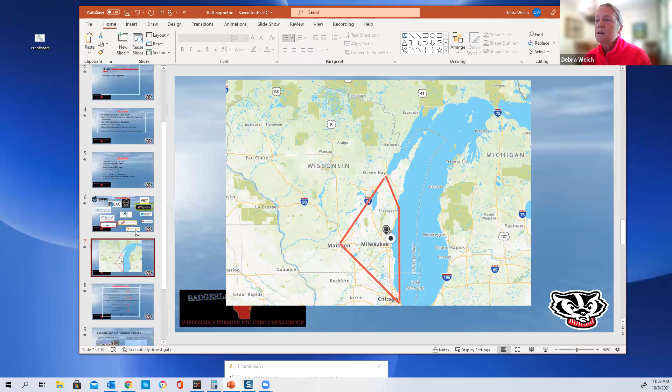So this is our area of Wisconsin, Green Bay to Madison to Milwaukee to Chicago. Most of the people that attend these meetings are Milwaukee people with suburban Milwaukee. We do have membership dues, fees. Since we're just having virtual meetings, I think this year we reduced that by 50%. These have been our typical meeting venues. Manpower downtown, we get that whole center. And then Blue Harbor, we try to go there every summer, but the last 2 years we've had to cancel.

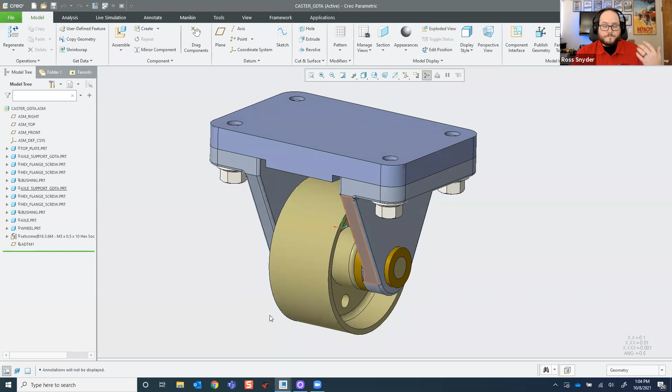So for instance, one of the main parts that we're going to be working with is the support arm here, and you can see that we've got a pressed in bearing and we've got an axle, it's got a support and it's bolted in with M10s, things like that. So with that, I'll jump into a quick run through on our GD&T Advisor tool in general. We've got Creo 8 open here, and of course my little Zoom window is hiding what I need to see. One second, there we go.

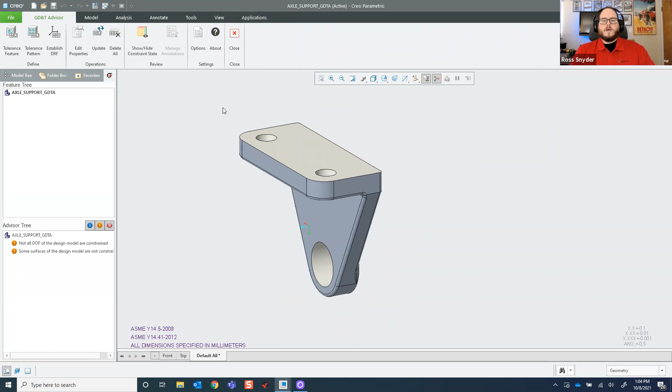Up in the Applications tab, you can pull up our GD&T Advisor tab. Now, once you turn that tool on, up here you can see that we've got an additional toolbar. This is where we're going to be pulling all of our commands in for the GD&T Advisor. Down here, we've got our feature tree. As we start adding our different callouts for GD&T annotations, they will start populating here within this feature tree. It will look very similar to a model tree you would see in a Creo design space, or SolidWorks or any other modeling tool.

Down here is our advisor tree. This is going to populate similarly to the feature tree, but this will all be information based on feedback from GD&T Advisor. So information like what we're seeing now, that not all of our degrees of freedom have been constrained yet, or that we have not constrained certain surfaces of the model. Any errors or informational messages will also pop up here. This is the section of the tool that will guide us through making sure that our GD&T calls are accurate, which is part of why using GD&T Advisor to add annotations makes things quick, easy and painless.

In our main window here, we've got our part, or later our assembly, that we'll be working with. And down here brings us to one of the first feature updates in our latest release. In the window, you can see that our standards are listed: ASME Y14.5 and Y14.41, 2009 and 2012 respectively. One of the things that we added in our latest release was being able to adjust this information based on what standards you're trying to get your GD&T to adhere to.

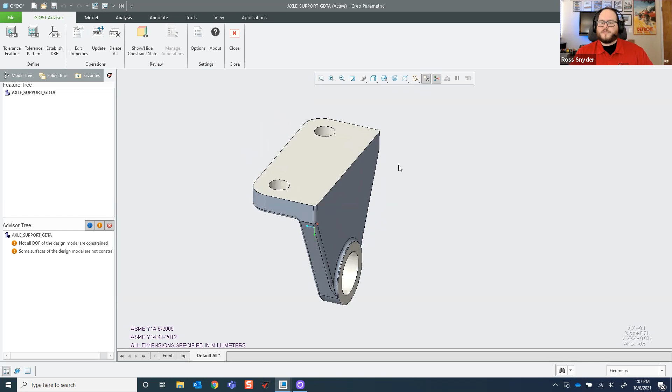Next, I am just going to walk through a brief example of getting some of our GD&T callouts placed on this model with the tool here. So we saw in the overall 3D image where this part fit into the caster wheel. We've got a mating surface up here and a couple of fastener holes, and this is where our bushing is going to be pressed into place. And with that, we're going to have to call these out and make sure that we control these with our GD&T. So if we go up here to tolerance feature, we can start doing that.

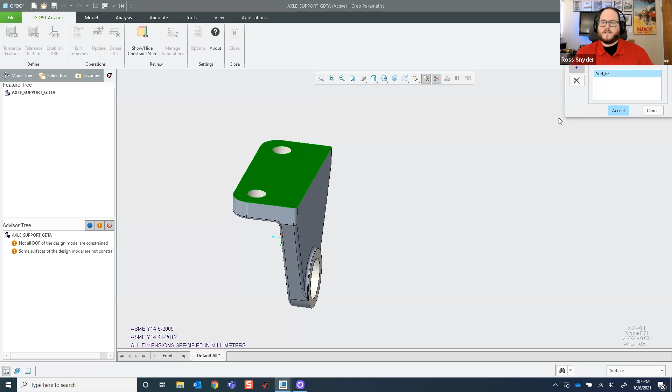So we'll go ahead and select that top surface and hit accept. And that will adjust this toolbar up here to give us our options for how we're going to be building our GD&T callout. Now, to start with, we can rename these. We can adjust whether or not we're trying to do a tolerance callout or just a sizing dimension. Over in this drop down here, you can see that we're able to select what kind of a GD&T callout we are using: straightness, flatness, circularity, things of that nature, perpendicularity. But all of these are grayed out except for a couple of different options. There's a good reason for that.

So the GD&T advisor is helping guide you into making the right decision for the kind of callout that you need to make for this particular application. And because we have no existing annotations that we're basing things off of, flat surface over here, it's recommending either flatness or profile of a surface. So these are both highlighted green to suggest that they're a good option for making this particular annotation. Now you can see there's a little asterisk right here. The software will give you a strongest recommendation. That's what's going on here. So we'll go ahead and stick with those recommendations. And just for simplicity, we'll be keeping the tolerances fairly basic on this, just 0.1.

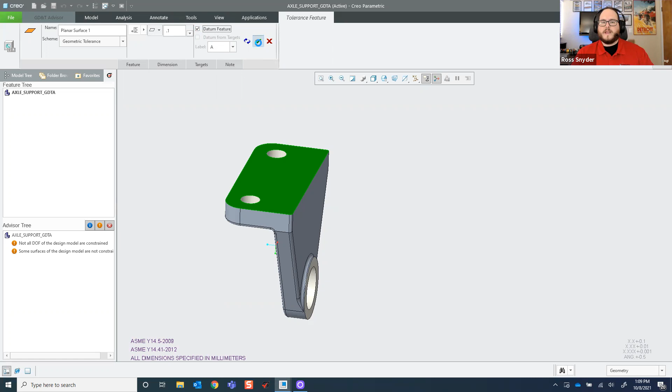Over here, you can see that it's automatically assumed, because this is the first callout that we're going to be making on the part, that it is going to be our datum A. As we go through and we add more GD&T annotations, we can actually deselect this and decide that these particular features that we're adding are not going to be datums, or it'll pick up after A, B, and C are listed. You can add a datum if you want to, but the option is also available to be turned off. So with that, we've ticked all the boxes for our requirements for the tool, and now we can hit the green check mark, and that drops that right in there, and it'll bring our annotation in based on these standards that we have selected.

So let's go through and continue adding our various annotations that we need in here. And so we'll go ahead and drop in our tolerance for this. And again, you can see with this drop down, we've got some new options that have popped up for us. But it's still making a recommendation of perpendicularity and angularity. We're going to go with perpendicularity, but the software will also help explain why shouldn't I use some of these other options that are available to us. So if we highlight over these, you can see, for instance, circularity will result in an under constrained feature. Or if we're trying to do a runout, that's not compatible with the current DRFs that we're using right now, so our datum reference frames.

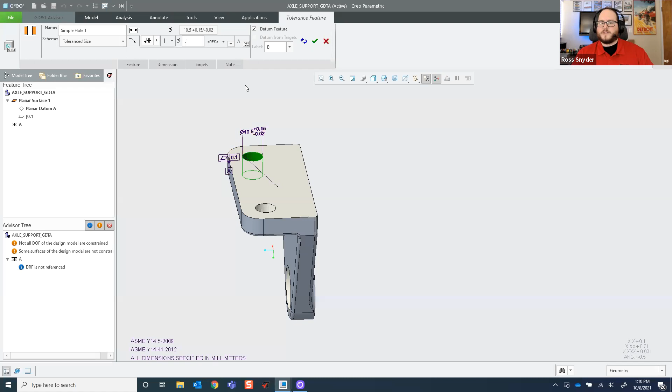So we'll go ahead and stick with perpendicularity, and we'll leave this over here as regardless of feature size. But this is an area where we can add our maximum material condition or least material condition callout as well. We can also adjust what DRF we're trying to reference, but it automatically assumes, based on what we have available to us, which one we'd like to reference for this particular callout. And we do want this to be our datum B, so we can leave that alone and move forward. And so now that we've got that callout, let's go ahead and do the same for the other hole.

And we'll leave that alone, put that in as 0.1, leave this here as RFS, and that's going to be our datum C. Now, you can see that as we're progressing through here, the two notices that we originally started with, that our degrees of freedom are not fully constrained yet, and that some surfaces in the design model are not constrained, are still there. We're still working towards making sure that our degrees of freedom fully take care of that.

But if you pay attention down here as we go through and add more of our datum references, you can see that it's letting us know that that new AB datum reference that we just added is not being used by anything. It's just a little blue dot. It's letting us know informationally that that's a thing, but that'll update and change as we start adding things.

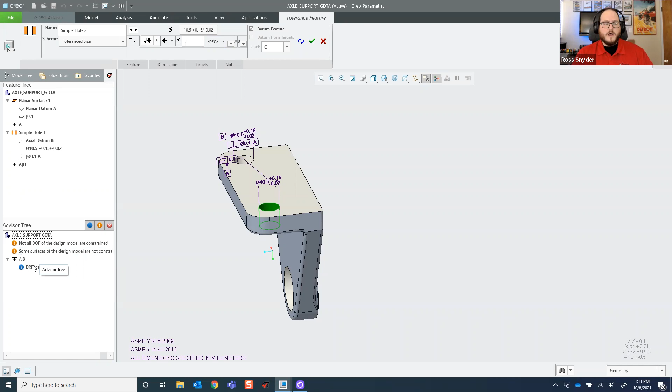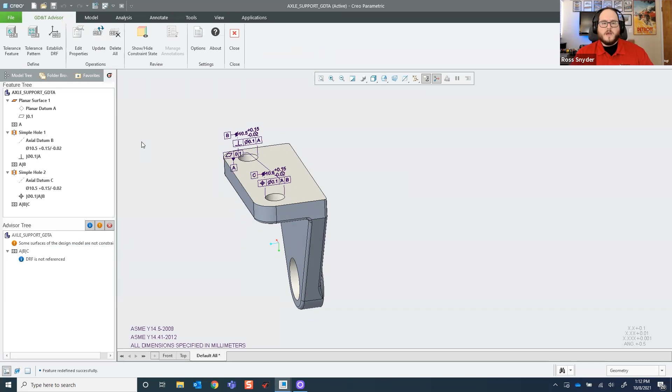So for instance, as we drop this in here, you can see that that is now changed to the ABC DRF is not being referenced, but because we got our 3 datums in there and they are sufficient to take care of our degrees of freedom, that notice has gone away for us to take care of in the advisor tree.

Now, on the top here, we know that those 2 bolt holes and our mating surface are all taken care of, but we have a couple of other critical features, namely the area where we're going to be pressing that bushing in, and the surface that's going to end up mating up to. So let's go ahead and get those taken care of. Go ahead and start with our hole for our bushing, and we can put that in as 0.1 and here.

And then something else that we can also do, if you're looking to further control your datum reference frame, you can actually add segments for this in with this drop down here. Or if you bump it on accident, you can pull them back out by using this. But it will also make recommendations based on what you're looking for, just as the other windows have. So let's stick with parallelism for a second, and we're going to put this as a 0.2 this time, and I'll show you guys something cool.

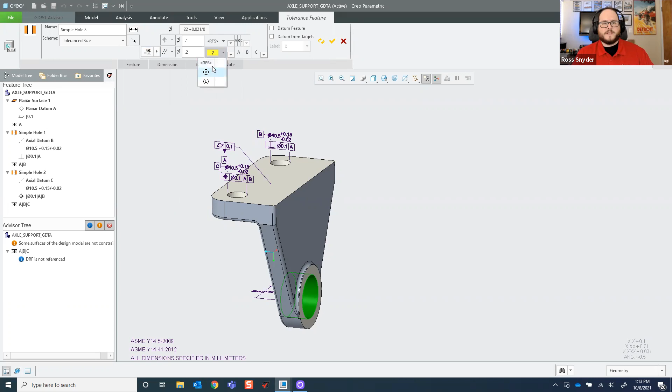So if we go ahead and we click in here, we can see that we got a little bit of an error message going on. Now, as we add these different annotations, despite the fact that we're selecting from different things that are recommended to us with the tool, if we do punch in anything that's incorrect, the software is going to start popping errors up to let us know what we need to be looking for.

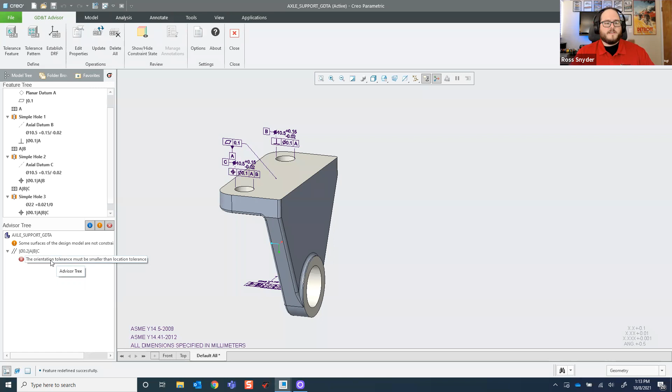So down here, you can see that it's telling us that the orientation tolerance must be smaller than location tolerance. Well, I don't know which one you're talking about. So if we click on it, it'll highlight which callout that we just did. And that is the stacked callout down here that we just dropped in. So if we go back and edit that last annotation that we put in here, what we can see is, oh yeah, I forgot. This has to be less than this.

So if we make that a 0.02, for instance, and hit OK, that's still not fixing it. We need to make sure that when we click off on these, that our feature here, 0.02, there we go. Great, hit OK. And as we correct those, then those errors will go away.

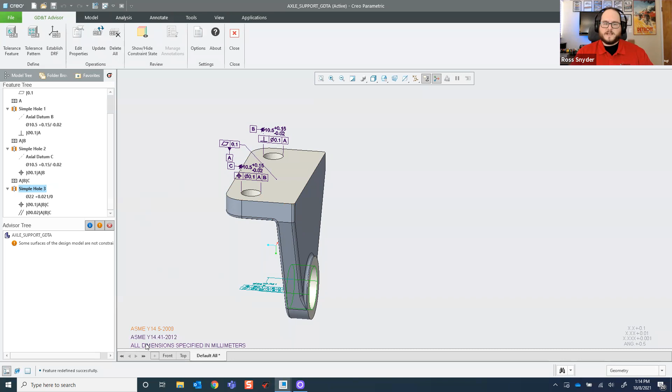And so we can tick through and make sure that while we're adding all these different annotations, we're keeping things correct and we're not over constraining or adding incorrect callouts to anything based on the standards that we've selected in the beginning of setting this up. So now that we've added those, we can add our last surface feature down here, we'll hit accept, drop in that 0.1.

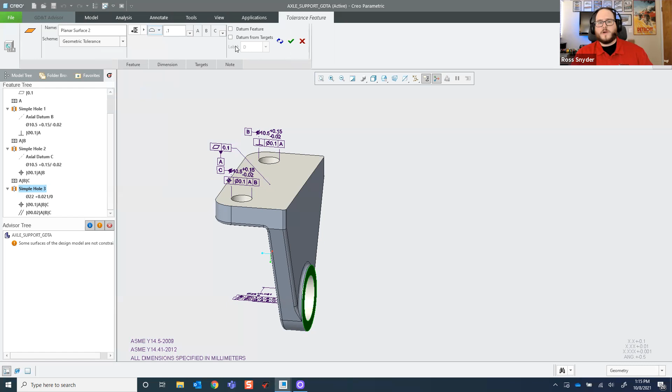We've got all of our reference features referenced up in here, and we can see that it wants us to use profile of a surface. That's what we'd like to use anyway. We do not need an additional datum for anything, and we can go ahead and hit OK on that. Now, we know from a manufacturing standpoint that we've added all of the controls that we need for the important surfaces that are inside our part.

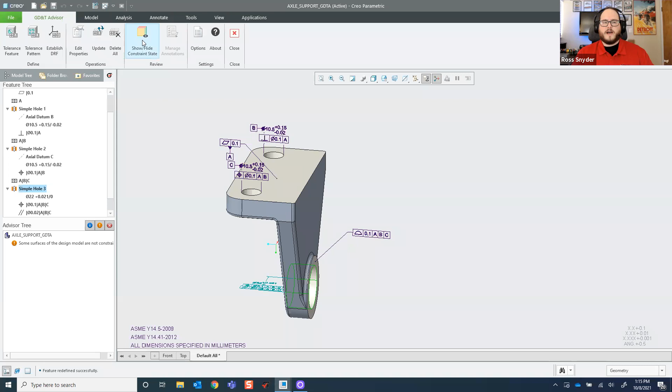However, we're still getting this message here that's telling us that some of the surfaces aren't constrained. Now, if we want to take care of that, one tool that we have at our disposal is this show and hide constraint state feature. If we click on this, you'll notice that it paints the part up in a couple places in a bunch of cool colors.

And what it'll let you know down here with the legend is that all of those things that you just interacted with, those are fully constrained. Or if you missed constraining something and it's partially constrained, it'll highlight that as well. But we can see that while all of our critical features have been constrained, the rest of the part is not constrained. Well, while those aren't super necessary for what we've got going on here, it'd be nice to control those just for the sake of manufacturing for our particular situation.

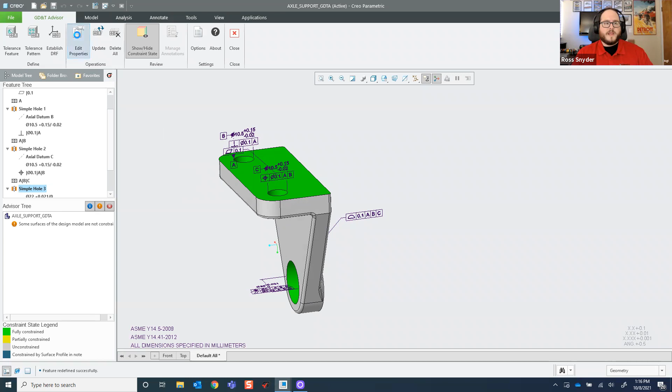So we can do that with a general surface callout, which can be added from properties. So if we go up here and we jump into properties and notes, we can add a general profile tolerance to our part. And if we click on that profile tolerance, we can add in the tolerance that we'd like to add to that and hit OK.

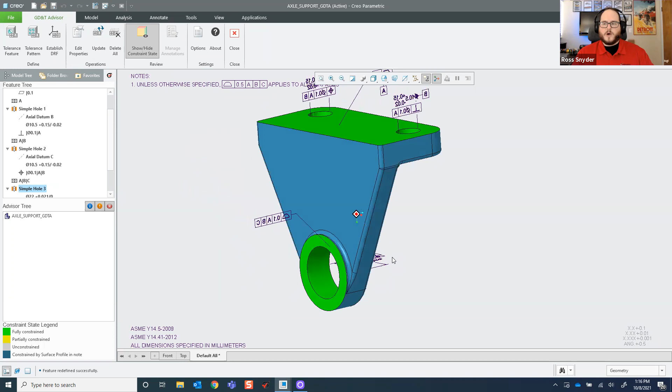And now we can see that by jumping in and doing that, all of the different surfaces of this part have now been fully constrained. We're good to go there. And you can see that that notation that we had an issue over here in the advisor tree has been taken care of. So that's kind of the basics of walking through just adding some tolerance dimensions to your part here.

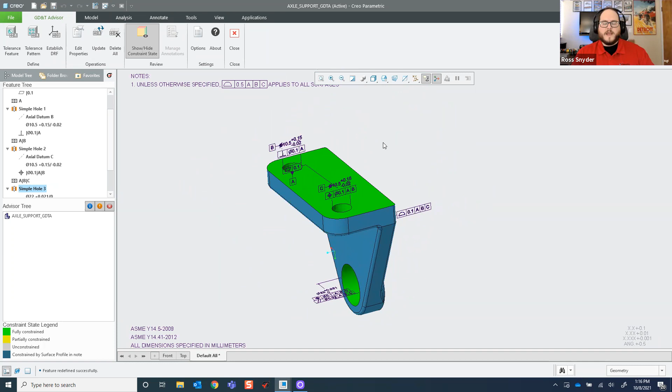Next, I'd like to jump in and open up another part that I've got that I've aptly named our problem plate. So if you're working with parts that come with partial annotation or existing annotation, one of the things that you can do is you can run the GD&T advisor and make sure that those annotations are correct and interact with those in case they aren't correct.

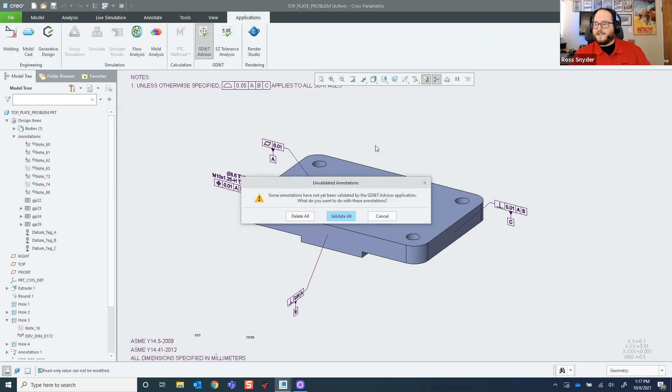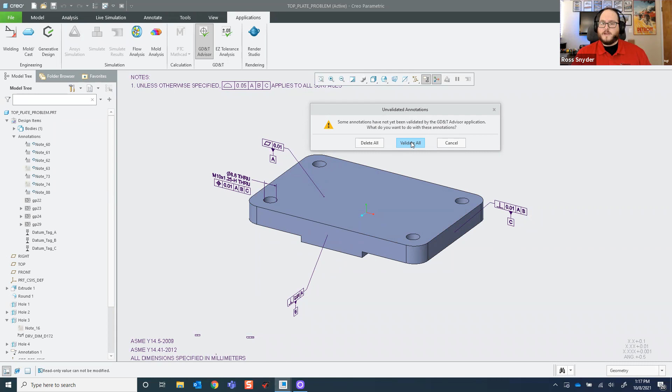So if we go back up here and we boot up GD&T advisor in this window, you'll see the beginnings of one of our features that we've added again to our Creo 8 release of our GD&T advisor. So this window is going to let you right out the gate decide, okay, well, I've only got a few annotations, I'm just going to blast these away and start from scratch. So that is an option here. Or if you'd like, it will also run through and validate all of your existing GD&T annotations that are on the part and let you know if there's any issues.

So we'll go ahead and hit validate all, let that run for a second and think about it. And once we've done that, we can see that, man, that populated all that same information right here in our tree for us, with all the details for the different callouts. And everything looks to be mostly on the up and up, except we've got a couple of issues that have popped up in here. So let's take a look at those and see what's going on.

So to start with, we can see that the 0 value tolerance is not allowed. Now, this is a pretty minimal callout. It can be a little up in the air. Just an example of where, as you've selected which particular set of standards that you're trying to adhere to, the GD&T advisor will go through and analyze the existing annotations and make sure that they are up to those standards. And if there's any inconsistencies or inaccuracies based on those standards, it'll flag them so that you can fix them. So let's go ahead and get that fixed.

But let's say that we're a little bit new to adding our GD&T callouts and we're not as familiar with what it's trying to tell us here. If we go into the help menu and pull that up with a right click, not only will it define what it's trying to tell us, but it'll also let us know why and to what standard this conflicts with. So you can see here that it's telling us that based on that 1441 standard that we've got selected, we're supposed to have a tolerance on a dimension and not leave it at nominal.

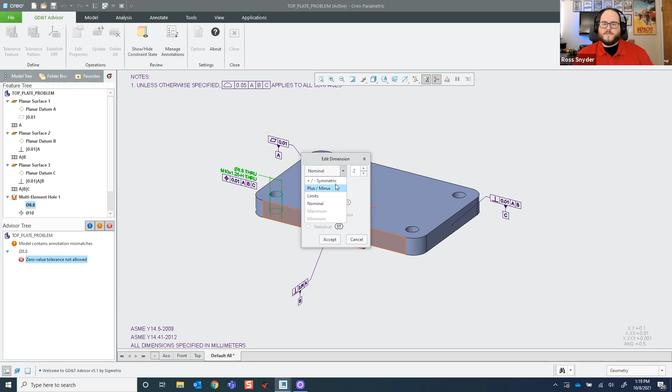So if we pop back over here, we can see that by clicking on it, it's highlighted that particular dimension that we've got here and the callout that it's connected to. We can go ahead and just edit that dimension's diameter and see that, yep, it's sure right. We've got that selected as nominal, and we need to put a tolerance on that. So if we hit this drop down, we can edit what kind of callout we've got on here and just throw our regular symmetric tolerance on. If we hit accept, we can see that, boom, that problem's been taken care of and we can move on. And that's just one example of how it highlights you through the process.

Now, this other notification that we're getting from our advisor tree here, this is telling us that we've got an annotation mismatch here. And so this is where another one of the features that we've adjusted more so than added for the new release comes into play. So if we go up here to manage annotations, we can take care of this mismatch

that we've got listed. Now, this used to be taken care of automatically when we validated all of the existing annotations. But because that moves really quick and you could see that little window was just popping through things real fast and then disappeared, and I don't know what it checked, I don't know what it fixed. We slowed the process down a little bit so it was a little bit more clear for the users.

And now, other than just checking off that, yep, these are okay, if there's any sort of mismatches that you need to address directly, it gives you the option and lists off what's going on right here in the manage annotation windows. Also, if you come back after you've added additional annotations that haven't been validated, it'll let you know if there's any additional annotations that you need to validate through that process as well. And you can refresh that and either delete them or validate those that way.

But for here, we can see that on that same callout that was our little problem child earlier, it's giving us a shape modifier required. So I thought when I put that in, that looked great. You know, it's got what I thought it needed for all the information. It went in there fine. It looks like it's complete. I'm not sure what's going on.

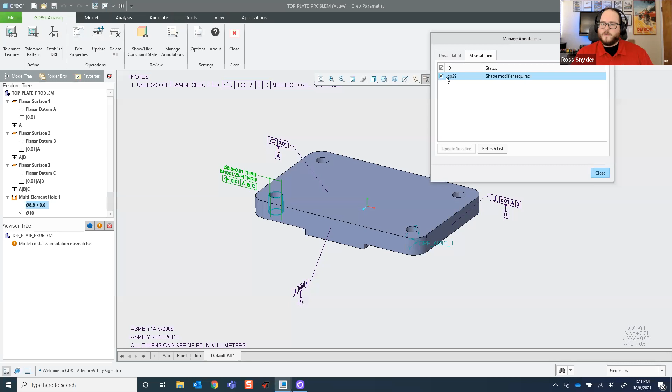Well, if we tick that box, the GD&T advisor will actually correct this issue for us, and we can hit update. And now we know that that annotation is what we were updating. Oh, you know what? We missed that diameter callout that was in that particular reference frame. So now that's been taken care of, and we can see that our error has gone away, and we don't have any more annotations that need managing, and so that's been grayed out as well.

And so from there, now we're good to go on this plate. We've checked all of the annotations that we put in Creo, and we don't need to mess around with any of these. We can be confident that these all adhere to the standards that we've selected, again, down here. So next, let's jump into one of the most asked about features that we've added.

Lost my headset for a second there.

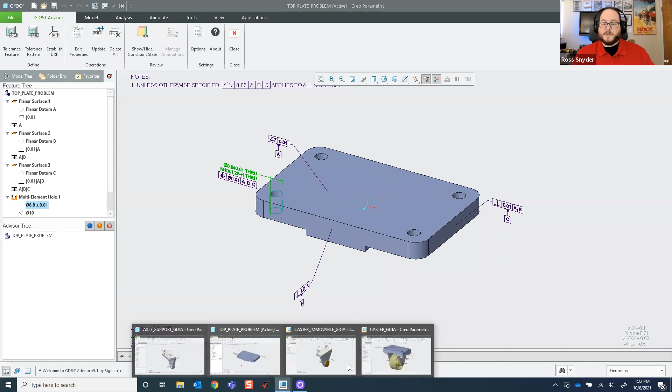One of the asked about features that we've got here, and that is working with our assemblies. So if we go ahead and pull this up here, this is an assembly that I've put together that is a little bit different than how we usually handle the caster wheel. And so what we've got going on here is I have pressed this bushing in, but let's go with the assumption that this bushing hole is so critical that we have to drill this in place in position after we've

pressed this in place. So working with the GD&T advisor with an assembly, what we can see is it treats this as basically an inseparable assembly. So these have been permanently affixed to each other, and that's how it will treat things going forward. This being press fit into here, good example of that. So what I'm going to do now is run through basically the same process that we ran through on this part without the bushing, and we're going to throw some of our annotations on here, and we'll get that moving. But now we can do this in an assembly state.

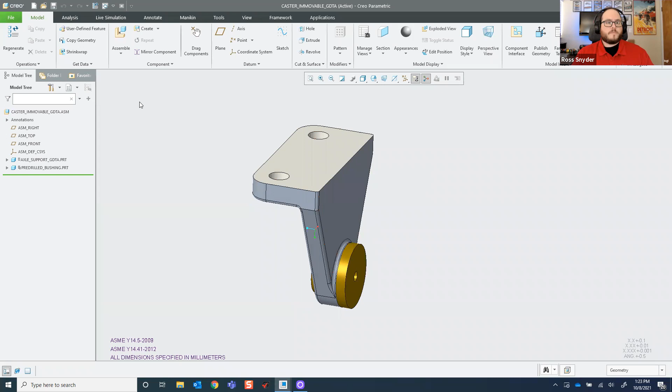So let's go ahead and boot up our GD&T advisor here and start tolerancing our part. So if we go ahead, we can add our top plate like we did last time for datum A. Hit OK. Now, this brings me to another option for us here. So we know that our datum B and C are supposed to be those holes.

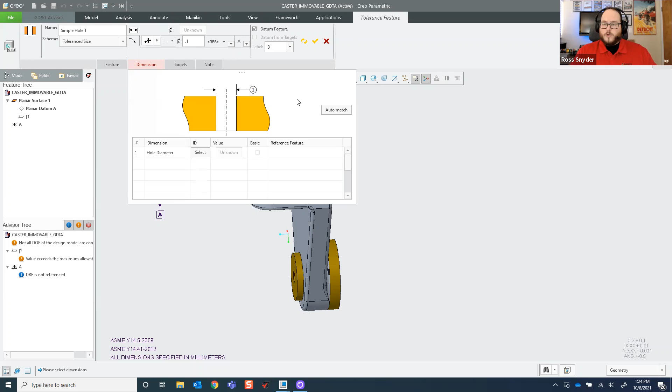So if we selected those and we put in our tolerance and we make sure that we are using this as a tolerance callout instead of a basic dimension callout here, we can see that, oh, we've got this red tab pulled up right here. Now, if we click on that to figure out why it's not letting us progress forward and add that datum B, we can see that, oh, shoot, we need that actual diameter callout in order to reference that for this particular annotation. Now, before, what you used to have to do is go, oh, shoot, that's right, I needed to add that.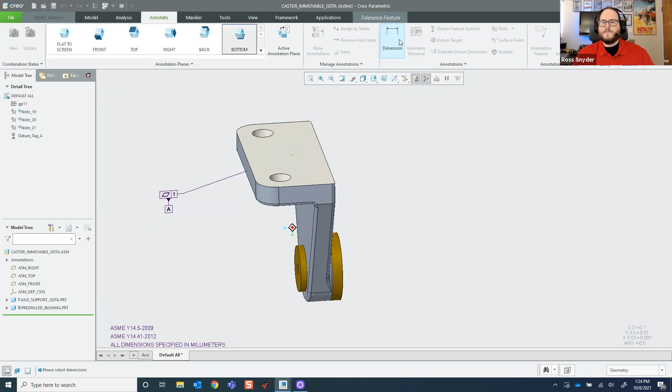You had to close out of GD&T Advisor, go over to your annotation window, and then correct the issue and add that stuff in there. We've tried to make this a little easier for you guys now, and what we've added is you don't have to do anything. You can just pop over here to annotate real quick, make sure that you're on the right annotation plane, and you can go ahead and select these particular callouts right here.

And let me double click that because we want that in a diameter and drop this in. And we can drop those dimensional callouts that we need in right here. And I know we're going to do this on the other hole as well, so let's go ahead and do that while we're here. And we can pop right back over to adding that tolerance in without having to reboot or click a bunch of toolbars to get back to where we needed to go.

Now, something I will give you guys a little bit of a teaser of right now, and I did run this by development where they did promise me that it was on the list. So there is, on the next release that we're working on, going to be an option to automatically generate those right from here, instead of having to, even as simply as it was, just to make things a little bit easier for you guys.

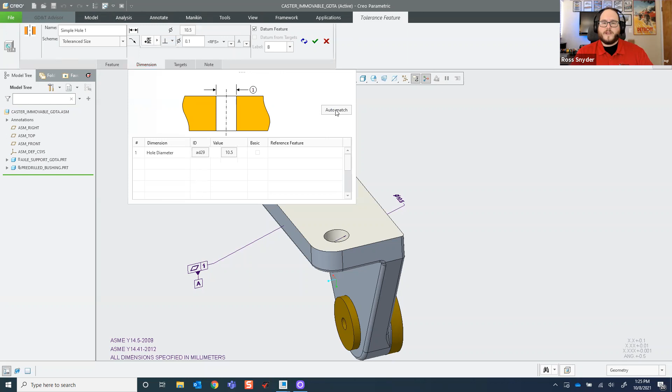So now one of the things we can do here is we can use this auto match button, and we can actually click this, and it'll find that diameter dimension that we put in, and reference it right away. And you can see that our check mark turned green and we're good to go. So we'll hit OK on that. We've got that particular callout. We'll do the same for the other one.

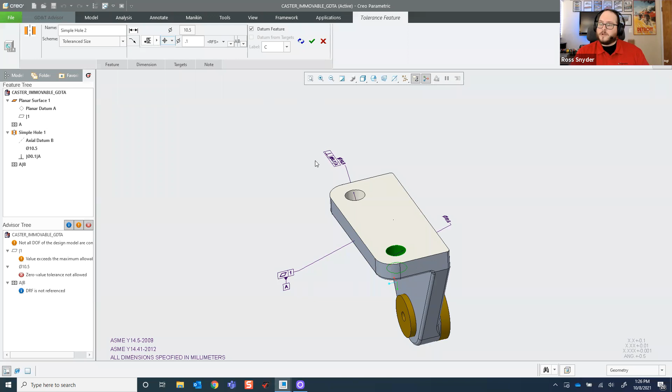Now, because we added that dimension, we don't need to redefine that dimension. It's already automatically found that it exists. So that's not pink, and that's why we don't have to dive into doing this a second time. But, much like the last time, we've got the different requirements or recommendations over here in our dropdowns. Everything is interacting fairly similar to how we interact with the parts.

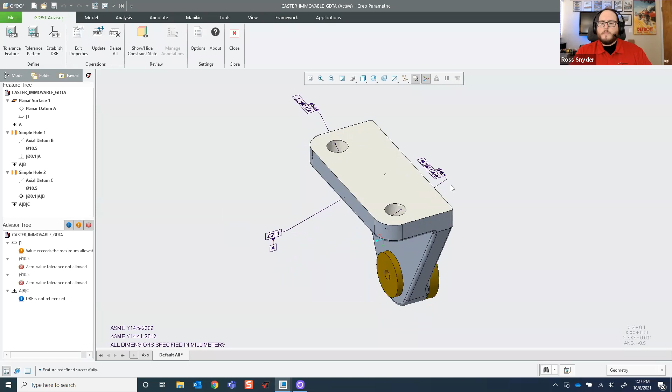The only thing that we do need to pay attention to is as we populate this, the errors that are going to start popping up in here are going to be a little bit less than they would be if you were to be working with just an individual part. So part of the reason for that is a lot of the assumption for working with this at an assembly level is that these are fully dimensioned at the part level.

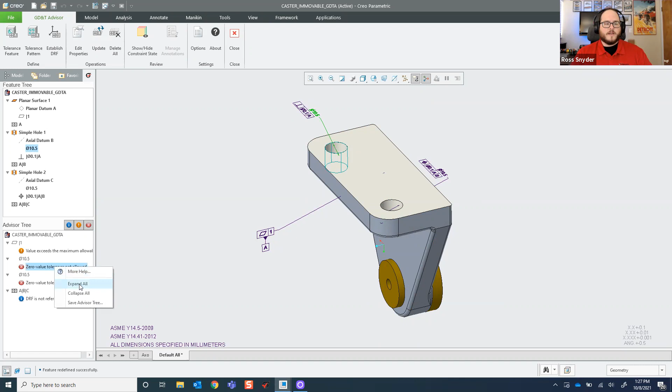So when you do that, those are available, and these are typically for assembly reference. You need them for a particular sort of inspection after assembly, in the case of our press fit before we drill, things like that. And we can see, though, that it is still checking for things like our zero tolerance issue that we had last time. So we can go through and correct those to our symmetric tolerances, and do that for this one as well before we move on and add those.

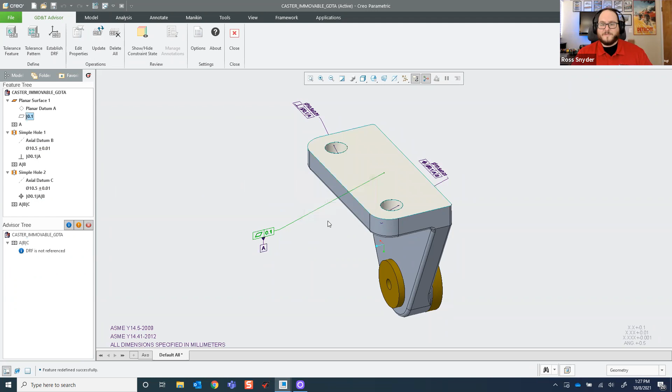Great. And we can see here that we have another callout that our value exceeds our maximum tolerance value because we made a typo, and that's supposed to be a 0.1, not a 1. And so as we work through, you can see that we've only added our A, B, and C datums, and so we've got our degrees of freedom controlled, but we don't have any other notices that the part's under constrained, that it is missing certain definitions for certain surfaces, because the software understands that we're working at an assembly level.

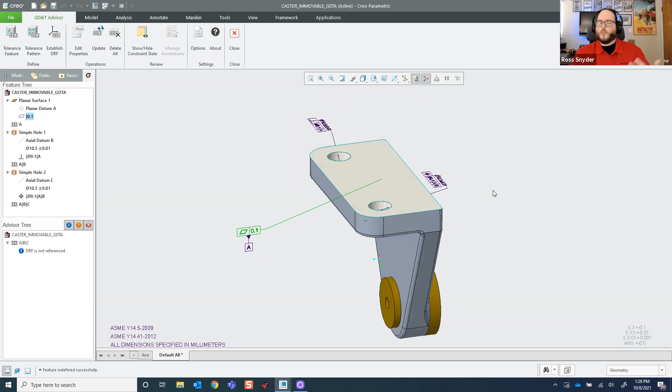So let's go ahead and throw on just our surface callout here for our bushing, a 0.1, because we learned our lesson from last time. And we'll go ahead and tolerance that hole that we're going to use as a pilot hole for further drilling that out in the correct spot later. And we can see that that has also automatically generated things, does not require an additional datum. It just makes this really quick and easy.

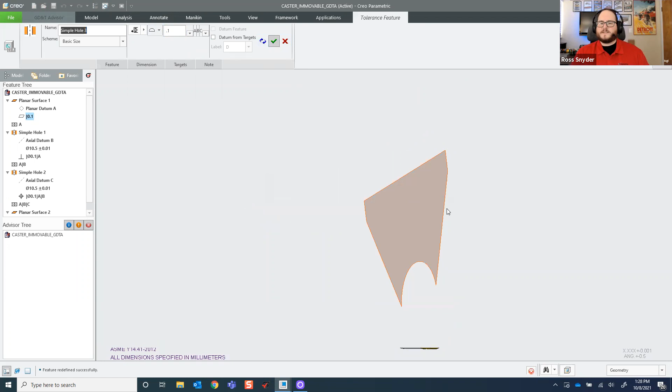And so with that, the only other thing that I will note is that if you have to do any sort of callout for a regular dimension instead of a tolerancing dimension, you can set those as references here as well, because reference dimensions are acceptable at the assembly level.

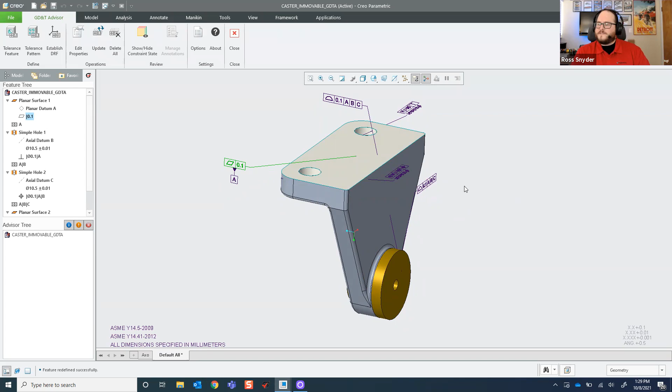And with that, that is the overview of our brief demo. Our new features, they're a little bit here and there. We kind of tried to pay attention to the feedback we got and everything, but that'll give you guys a good indication of bigger updates, like working with assemblies, and smaller updates like not zooming through all of your validation.

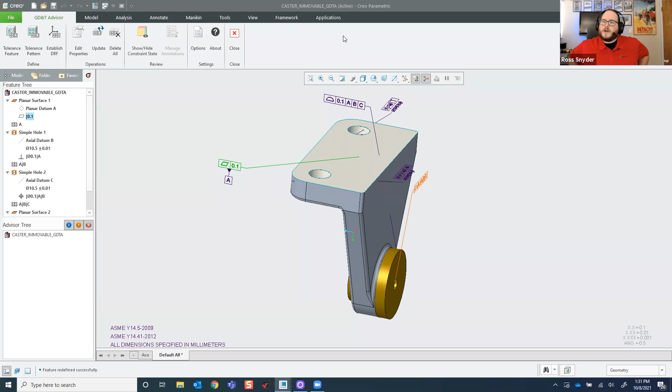So to answer that question, I don't believe that just by adding more decimal places to that particular call, it would fix that particular justification. Just because it was asking for an actual tolerance value, and when we went to correct it, we didn't change a tolerance. We actually added one.

So the way that I read this is lots of times companies have in the title block, you know, 1 decimal point, it's this tolerance, 2 decimal points, this tolerance, but that's not something that this can see. Is that correct? That the GD&T Advisor can see, that type of tolerance block note.

So the tolerances that it'll pick up on in here are annotations that you've added in the actual software, and it'll bring that in. But conversely, if you don't have anything, or you'd like to redo them or add additional tolerances, these annotations will immediately be saved to your Creo file. It is an additional authoring tool for you.

So if I could add a little bit of detail to this. GD&T Advisor is really focused on accurate model-based definition. And so the concept of a generalized tolerance in the world of MBD is still somewhat gray right now. In fact, I've heard it discussed at different events as an area where the standards need to make some progress, and there's debate on what's the appropriate approach.

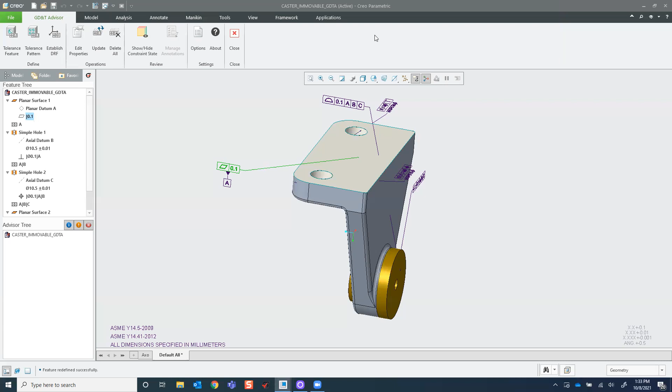Anybody else have any other questions for us? Floor's open. Just wondering about a freebie test license. Does something like that exist for a short amount of time? Stephen or Kyle might be able to answer that question a little better than I can.

So yeah, my name's Kyle Hightower. I'm one of the account managers for Sigmetrix, and that can be done, but usually it is direct through your PTC reseller. Sigmetrix develops the software and supports all of the training needs for this tool, as well as the 1D tolerance analysis tool. But the majority of an actual freebie or sales cycle is direct through your PTC channel partner.